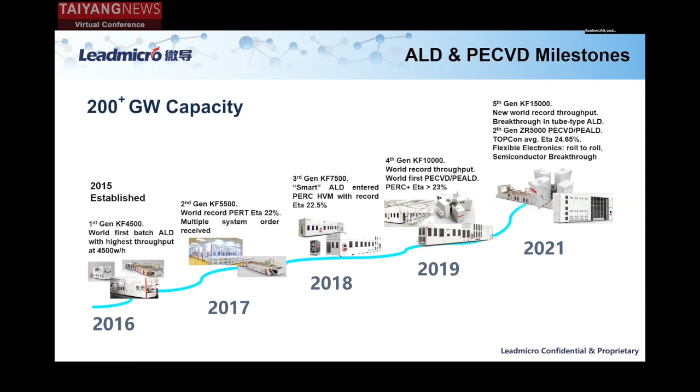For the ALD and PECVD milestones, our company was established in 2015, and at the beginning we introduced the batch type of ALD in solar cell applications to replace the inline type of PECVD. Since 2019, we started to develop our PECVD tool with the integration of the PEALD technologies from Leadmicro. And last year, for this new technology, we reached a lot of breakthroughs. Based on this PECVD and PEALD process, our Topcon average cell efficiency reached 24.65 by end of last year. So this year, we are mainly focused on mass production of this new technology, which we are going to share with you in detail very shortly.

So this is our company's product series. We started with the KF series, which is a thermal batch type of ALD. In today's presentation, I'm mainly going to talk about our Zhurong series, which is basically a tube type of PECVD platform integrated with our own developed PALD technologies.

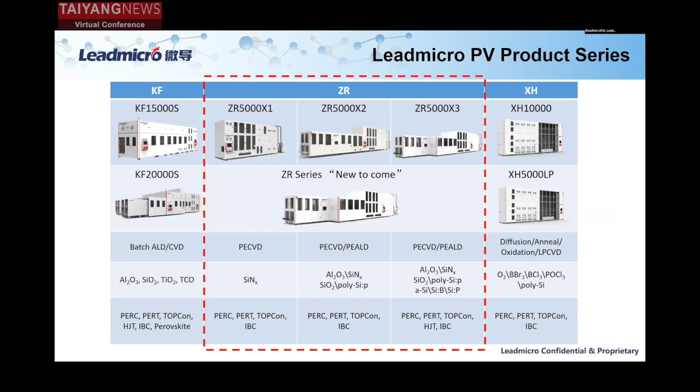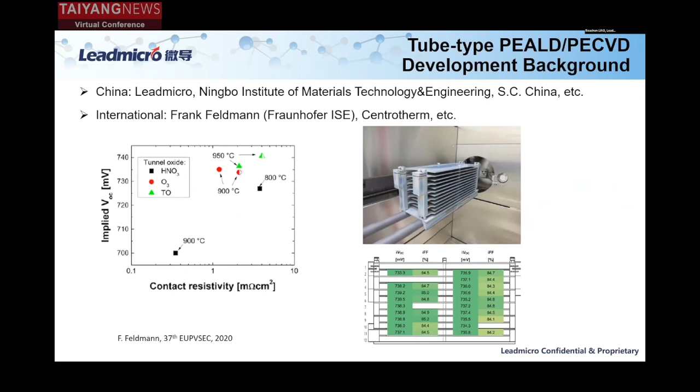So a little bit of background for this new technology. This tube type of PEALD technology has been studied quite intensively in recent years, both in China and internationally. In this area, we also have a long history of technology accumulation. We started the study of passivating contacts in 2013. In 2015, we received a passivating contact project from the Singapore government, mainly focused on PEALD passivating contacts. And in 2017, two years later, we received an industry project for industrialization of Topcon solar cells with 150 megawatt.

After successfully completing these two projects, we integrated all the experience together. Hence we came to this new technology, which combines PEALD plus PECVD poly plus Topcon together to resolve the bottleneck problems we encountered earlier. To be specific, we introduced about five new technologies, highlighted in red, to solve the main three key problems faced by Topcon.

One is the front side aluminum oxide. We introduced ALD and PEALD technology versus the traditional PECVD technology in PERC. For the tunnel oxide, we introduced PECVD and PEALD technology versus the traditional thermal oxide. For the polysilicon, we introduced PECVD versus LPCVD. By the way, all these technologies are based on tube type equipment, in favor of the mass production requirements of cost and maintenance. So for this talk, we are mainly focused on the tunnel oxide and the polysilicon.

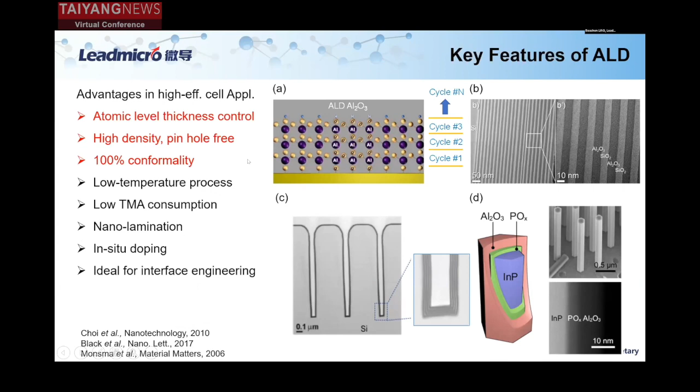So a little bit of the advantage of ALD, as we can see highlighted here. The advantage is atomic layer control, thickness control, high density, pinhole free, and also 100% conformality. So this adds a lot of value when we develop high efficiency cells.

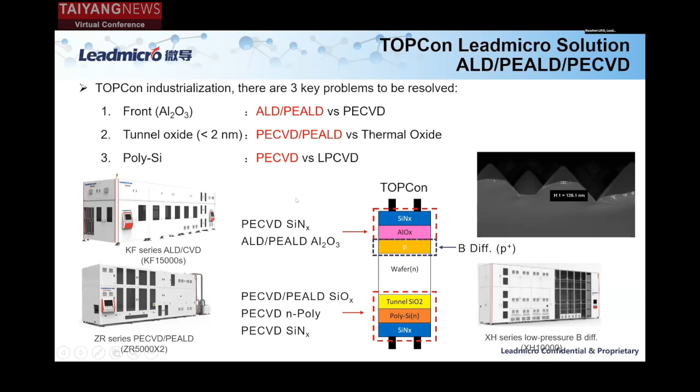If we come back to this page, actually you can see the tunnel oxide thickness is very, very thin, less than 2 nanometers. How to control this 2 nanometer thickness at sub-nanometer scale proactively? Probably ALD is one of the ideal methods, which we will show the data for later.

Based on all this new technology, we also developed the process for TOPCon manufacturing. So today we will mainly share this highlighted process, which is based on PECVD tunnel oxide and PECVD poly.

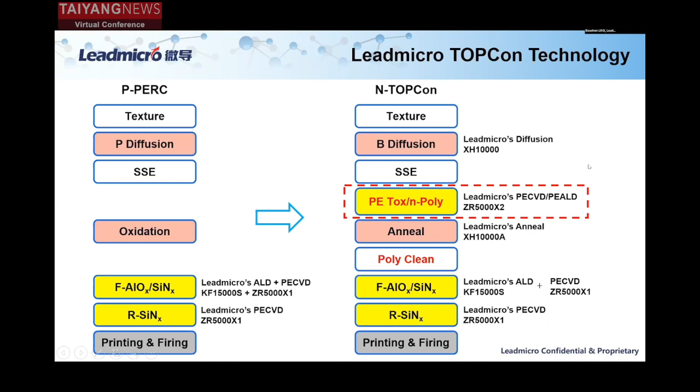Before we go into details, let's have an overview of all the mass production technology which is already available in the market. The first one is based on ion implantation. It's brought by Jolywood. The second solution is based on LPCVD intrinsic poly with phosphorus diffusion. This is currently under mass production by JinkoSolar. Solution 3 is using PVD in situ doped poly. This method is brought by Jolywood as well.

Today we are going to mainly share solutions 4 and 5, which use PECVD as the main method to develop the tunnel oxide and in situ doped polysilicon. For solution 4, both tunnel oxide and polysilicon use the PECVD method. This method is also known as 3-in-1 tech.

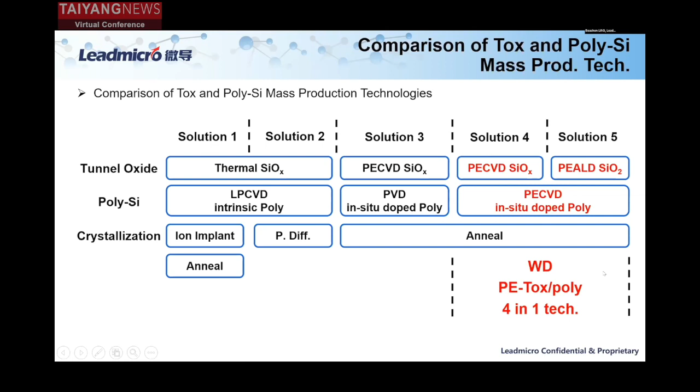But for Leadmicro, we also introduce one more option, which is based on PEALD tunnel oxide. Hence our technology is compatible with PEALD, so ours is the so-called 4-in-1 technology. For PECVD silicon oxide plus PECVD poly, we have 1 gigawatt scale mass production in Tongwei Solar. For PEALD silicon oxide plus PECVD poly, we have 1 gigawatt scale mass production in Suntech Wuxi.

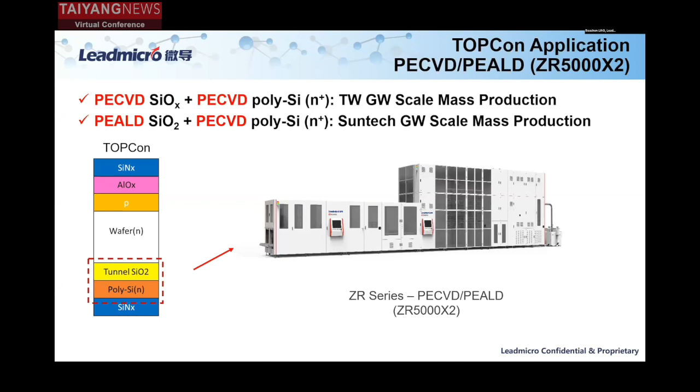The reason why we chose silicon oxide using PEALD and PECVD is very simple, as just explained. The tunnel oxide thickness is very thin. How to control this thickness at sub-nanometer scale proactively, with the large area uniformity and repeatability required for mass production? Probably ALD is one of the ideal choices.

As well, you can see the right-hand image here. Even with G12 size wafers, we can do the deposition very, very uniformly. As our PEALD technology is built on the PECVD platform, obviously it's very compatible with the PECVD silicon oxide process.

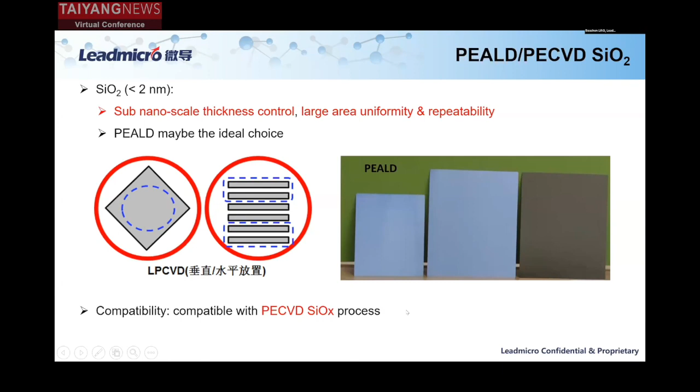The second one, for polysilicon, is a comparison between the LPCVD and PECVD methods. The LPCVD method is well known for its drawbacks: the wraparound and also the operating cost from quartz tube deposition. The PECVD method, in contrast, can resolve all the bottlenecks faced by the LPCVD method. Firstly, you can see the wraparound. The white color at the edge is less than 1 millimeter.

The second advantage is due to the plasma, which enables in situ doping without affecting the deposition rate. You can still do in situ doping at a high deposition rate. And due to this in situ doping, it also resolves the yield issue. It's very easy to clean.

We will share later. The second thing is the operation cost. You can see the bottom graph, right side. We all know the tube type PECVD system is based on the direct plasma principle. So only in the yellow area you see here, the graphite boat area, we have a very high intensity of plasma, which gives a high deposition rate. However, at the quartz wall area, the plasma density is very low, and as a result, the deposition rate is also very low.

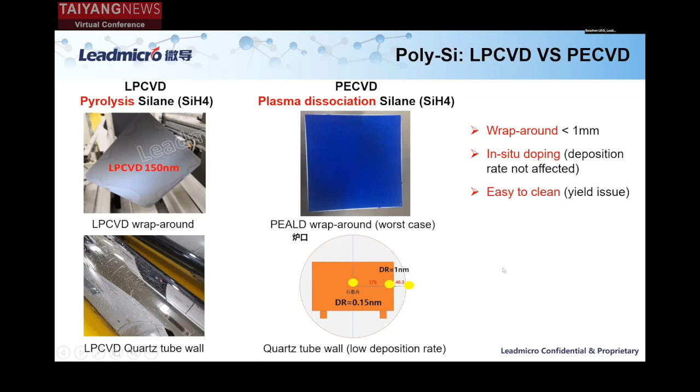Our system has been in the field for more than 3 years and close to 1 year of mass production already. We never encountered the problem of replacing the quartz tube due to deposition. So this perfectly resolves the bottleneck faced by the LPCVD method.

This page is a summary comparing the LPCVD and PECVD methods in terms of polysilicon deposition rate, polysilicon cleaning, and mass production. As we can see here, for the LPCVD method, single side deposition with phosphorus diffusion, we will have a yield issue in polysilicon cleaning due to the different BSG and PSG etching rates.

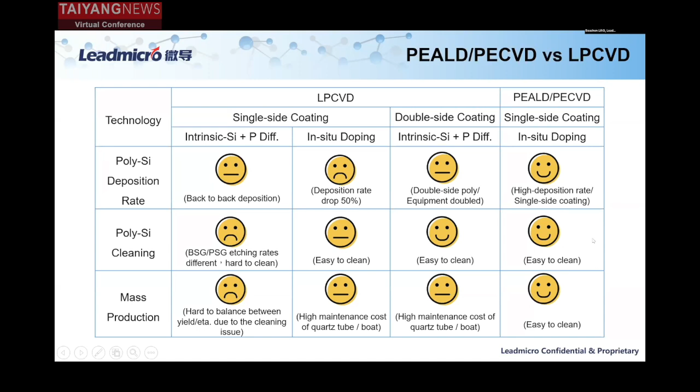Yeah, if we do the in-situ doping, we know the deposition rate will drop dramatically. So for the double-side coating, your equipment will be double, as well as your maintenance cost will be double. So as you can see here, only the PEALD and the PECVD method is a perfect method that can meet all the requirements. That's the reason we are moving towards the PECVD method, as we shared earlier. Here are some characterizations to further illustrate the advantage.

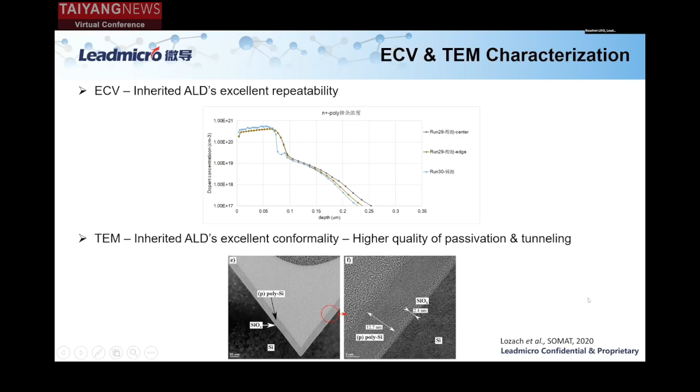As you see from the ECV, we can achieve very good uniformity and repeatability even on G12 size wafers. For the TEM image at the bottom, you can see that even with the ultra-thin silicon oxide around 2 nanometers, we can do a very uniform deposition even along the textured surface. This shows that it inherits ALD's excellent conformality. This also means you will get a higher quality of passivation and tunneling.

With all these advantages, here is the tool we brought to the market; we are probably the first one to integrate the PEALD and PECVD technology together. With this integration, you can do the in-situ tunnel oxide, in-situ polysilicon doping, in-situ element doping, and in-situ various thin film depositions. You can switch between PEALD and PECVD methods as you need. Furthermore, the doping level is tunable with the in-situ doping, with high yield and low cost. With all these advantages, it enables our TOPCon solar cell Voc greater than 715 millivolts on average.

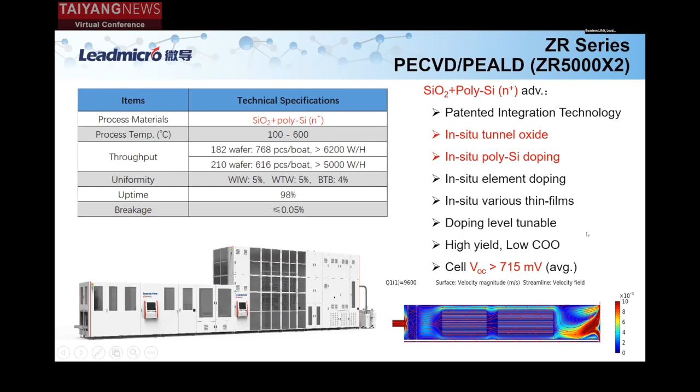So on this page, we are going to share with you our latest development and progress. Actually, we are probably the first one to introduce the tube-type PEALD and PECVD process and prove the feasibility of the technology. And we were the first to achieve cell efficiency above 24% last year in May.

In September 2020, our first breakthrough was the PEALD aluminum oxide technology. This work has been published in PIP this year, enabling lab performance for the industry. PEALD is well used in high efficiency solar cells, so we basically transferred this technology into mass production. This also fills in the gaps for AlOx deposition and gives us one more option for AlOx deposition in industry. And this work has also been selected as a featured cover for PIP in an issue which will be released very shortly, probably in another 1 to 2 months.

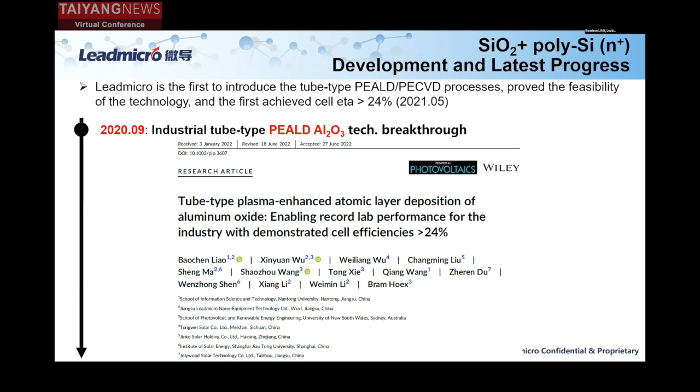After fixing the front side aluminum oxide, we could focus on the TOPCon cell rear side thin films. The first thing we tried to tackle is the PEALD silicon oxide. We successfully broke through this technology in February last year. This technology also fills in the gaps and provides one more option for tunnel oxide deposition. As you can see, many review articles haven't included the PEALD method as an option for tunnel oxide. Here we fill in the gaps.

After this, last June, we successfully broke through PECVD in-situ polysilicon. This is also a very big challenge. We encountered a lot of issues along the way. Due to limited time, I'll make it short and share two major problems we faced with this technology. One is the equipment issue, one is the process issue.

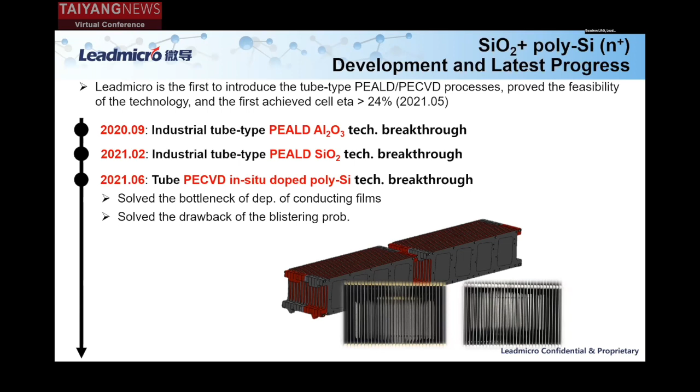So with all these breakthroughs in the equipment as well as in the process, finally this technology is ready for mass production. So after 1 month, in July, we received the Tongwei 1 gigawatt mass production order. From then onwards, we are trying to resolve the mass production issues.

The first thing we resolved is we integrated the PEALD and the PECVD technology together. This enables us to do the in-situ tunnel oxide. So your tunnel oxide doesn't need to break the vacuum. You can finish the tunnel oxide and continue with the PECVD poly deposition. So with this integration, it not only gives us a high quality tunnel oxide, it also gives us 15% more throughput. This is very critical for the industry.

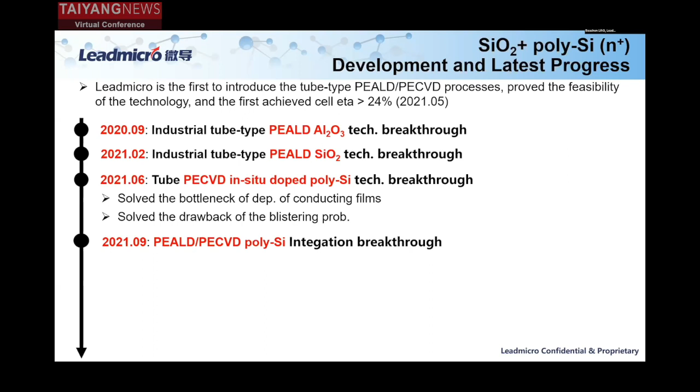So from September to the end of 2021 was mainly equipment moving for both projects, for Tongwei and Suntech. Both projects started mass production from January. We were finally transferring from the pilot line to mass production. To be honest, at the beginning, the yield was less than 50%. We started to doubt ourselves again, whether this technology is really just for the pilot line, whether it can be transferred to mass production, because the yield was very, very low.

After another half a year's hard work, we resolved all the yield problems one by one, and today our yield can reach greater than 97%. This data can be checked from the field, and sometimes the yield can even reach higher than 98%. So this yield rate is also one of the advantages, much higher than the LPCVD methods.

Furthermore, there are 2 milestones worth mentioning. In August this year, our PECVD silicon oxide and PECVD polysilicon gigawatt scale mass production cell efficiency surpassed 25%, based on our customer data. Just 1 month later, in September, our PEALD technology, silicon oxide plus PECVD poly, also surpassed 25%.

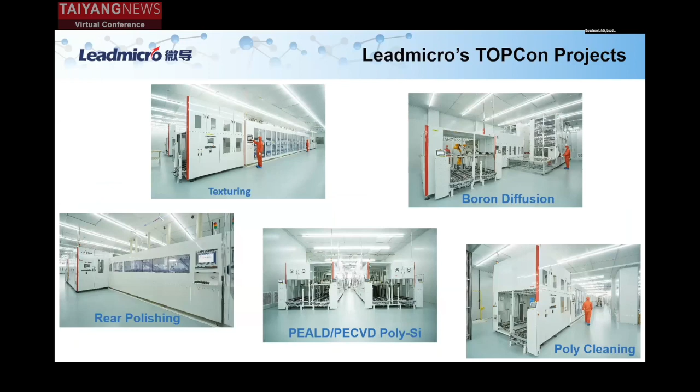At last, we share some of our smart TOPCon solutions. The 2 projects we just shared, one is in Shanghai, one is in Tongwei. This is our equipment in the clean room for the project. And this is our big data analysis and AI system for smart manufacturing.

Here we come to the conclusion. Today we have shared with you the latest progress and our journey in PECVD tunnel oxide and PECVD poly development, as well as ALD silicon oxide and PECVD poly. And we also shared our 2 cases of gigawatt scale mass production based on PECVD polysilicon.